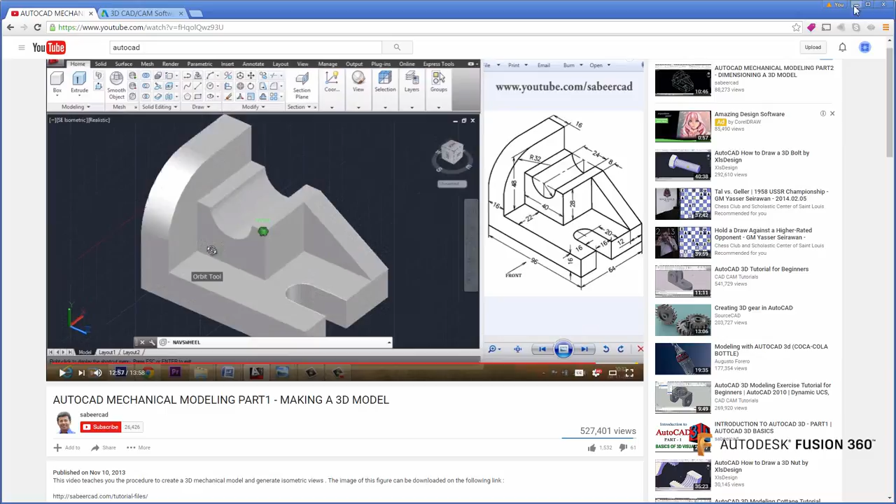So this is going to be a really nice apples to apples workflow. This is probably what you're familiar with if you're doing 3D AutoCAD right now, and then jumping back and creating it in Fusion. So if you want to see AutoCAD, watch this video. If you want to see mine on how we do it in Fusion, watch this.

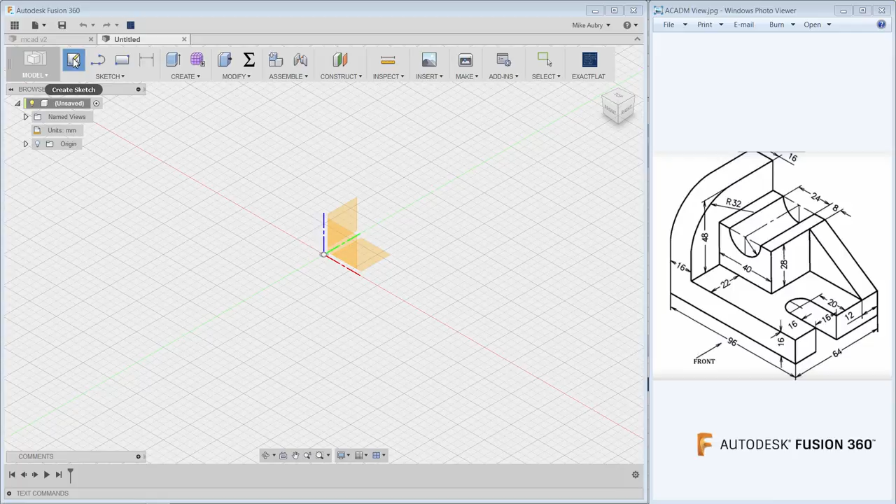I'm going to start from scratch on this by making a new design. The way we create 3D models in Fusion is we start off actually by making 2D sketches of the profiles we'd like to extrude. And so that's what this create sketch option is. We'll choose that, and then imagine like a piece of wax paper that sits on top of a table. We'll actually apply a sketch over top of one of these planes. Usually it's one of your origin planes that are shown here, your XY, your YZ. I'll actually click and put that over top of the XY one.

And then I'll just go to my top view. So there's your view cube like you'd have within AutoCAD. And we'll start creating our profiles. So the profiles are made with geometry that you're already familiar with coming from AutoCAD. So things like your rectangles, your arcs. The iconography is very similar, if not exact, on many of these items. The way you apply them is slightly different.

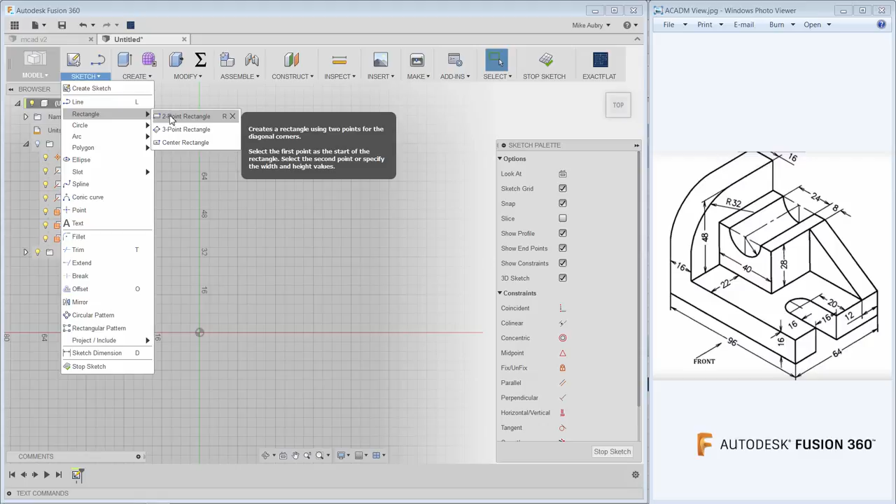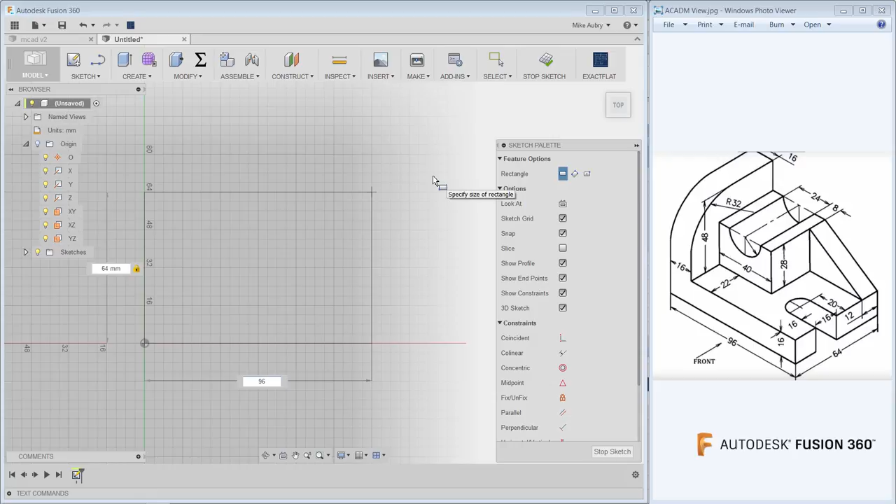We don't have a command line anymore, but a lot of that explicit entry style of creating geometry is still within Fusion. So for instance, if I go and start my rectangle here from the origin, good modeling best practice. Even though I don't have a command line, I can still be really precise from the get-go how big I want this rectangle to be. So I'll just go and say I'd like this to be 64 millimeters, hit the tab key, and make my horizontal geometry 96 millimeters, hit enter, and I have exactly the right size rectangle to start building from.

Another thing to notice is that it added the dimensions. So these dimensions are different than the common dimensions you'd see within AutoCAD. These are more analogous to what we'd call power dimensions in AutoCAD, in that they're parametric and you can drive the geometry from them. So if I go and I make this thing 50 millimeters, notice how the geometry updates. If I go and I put it back, everything moves. This is super powerful. It makes editing so much easier.

So as you get into Fusion, you'll really begin to love these dimensions. So definitely don't shy away from adding them. It's actually best practice to make sure you add dimensions to all of your geometry. As you're getting started, though, you can make highly accurate and precise models with or without dimensions.

Another way to do this is you can actually use your grid settings to make it so that the geometry is accurate to whatever you need it to be at. What you'll notice here is I have an adaptive grid. So as I zoom out, you'll notice that the increments are in 50 millimeters. As I zoom in, they get more and more precise. This is the default setting.

So if I wanted something to be 16 millimeters off, I just zoom in a little bit and go 5, 10, 15, 16, add a line. So here's 16, and you just kind of move up. I don't need a dimension. I can just go and measure it, and we'll show that this is actually 16 millimeters apart. So that's a really common way to model things up in AutoCAD.

AutoCAD users like to know that their lines are aligned to where they want them to be from the get-go, and that's what this grid allows you to do. In addition to that, you've got trim and extend. Those are still options you have coming from AutoCAD. So here, I'll trim these away, make it so it's in the right place. In this case, a lot of the dimensions on this part are divisible by 4.

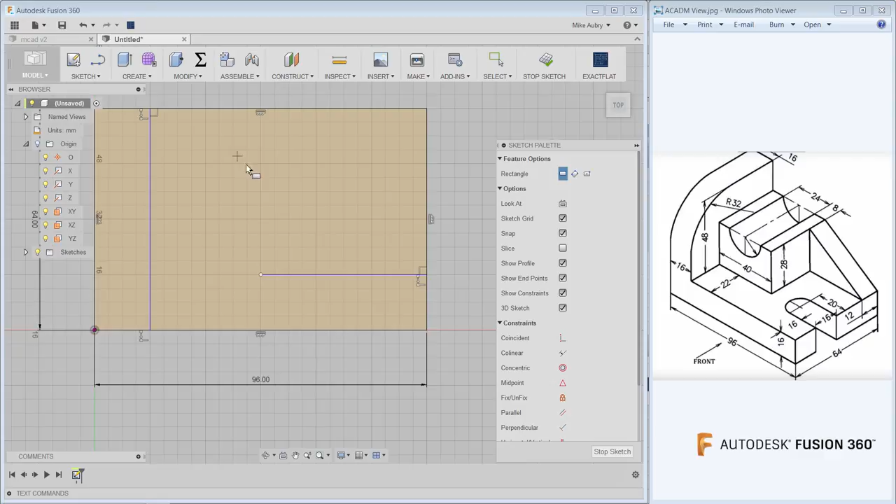As you get more familiar with the way Fusion thinks, you will gradually start to move away from using grids. You'll actually start just building geometry, and then you'll dimension it later. So let me show you where you'll get to. What I'm doing here is I'm just going to create some basic geometry, and then I'm going to dimension it later to see how it behaves. So I'll add just an arc here, and then I'll add a line.

And what I'm creating here is geometry that's not dimensioned, but it is constrained, and I'm choosing how I want the geometry to behave. That's what these little icons are. If I hover over this, this is actually a horizontal constraint. This is a tangency constraint. Check this out. If I make a line here, that's that little horizontal constraint there. I can't move it, so it's horizontal. It's always horizontal. If I delete this, now I can move it.

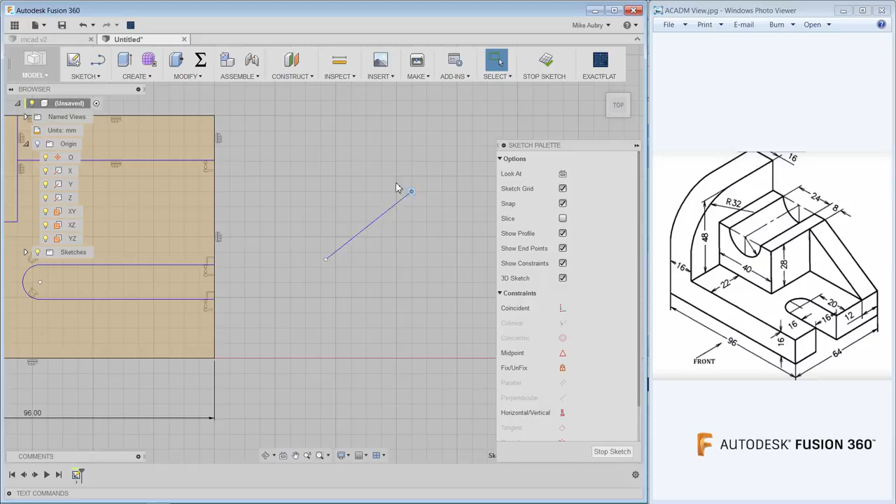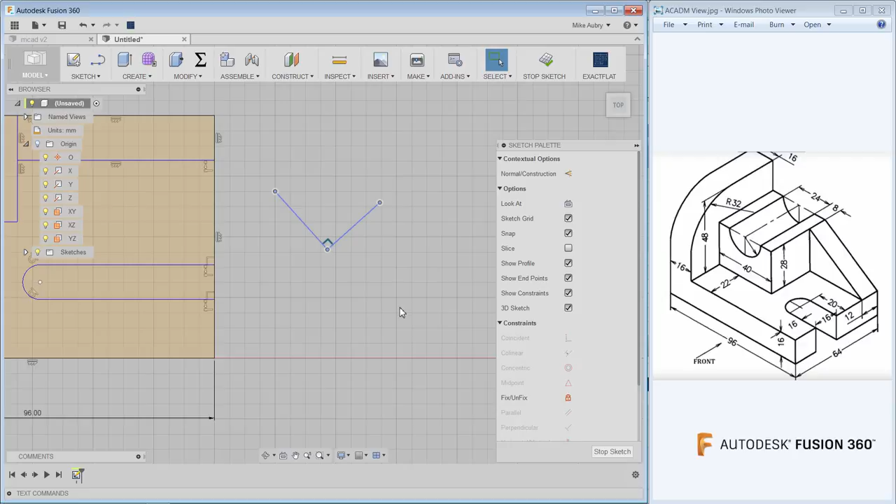If I move it here, and let's add another line, I can add a constraint. So there's no constraint right now other than that they're coincident, they're touching. But I can actually say I'd like this to be perpendicular to this line. And now I have an icon that shows that. So I can move it. So these little constraints you have right here can determine how your geometry behaves. And they're really powerful. It's a little bit of extra thought than what you'd sometimes have in your regular AutoCAD stuff.

But what it gets you is when I add my dimensions, it makes things a lot more editable. So if I just add this one, we know this one's accurate. I already put it in the right place. But I can add this, which I know is wrong. But now when I make it 40, everything updates the way I would expect it to. It's behaving the way I want it to. I can say I'd like this to be 22 offset. Behaves great.

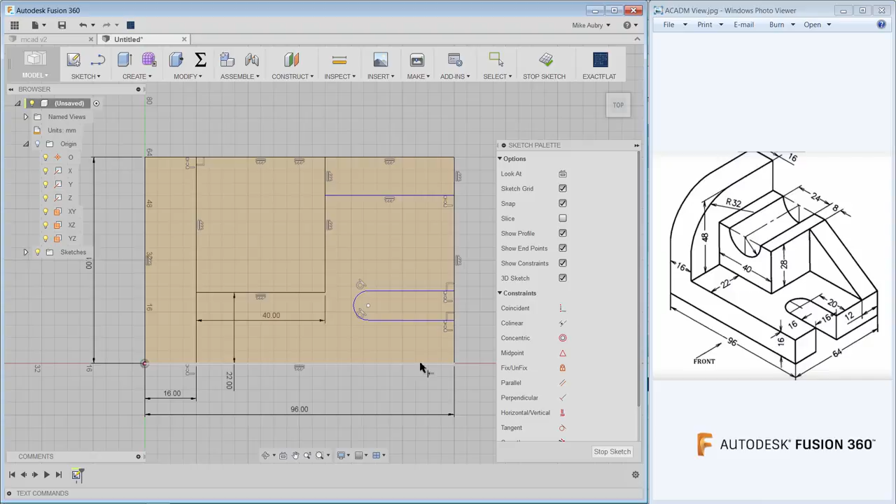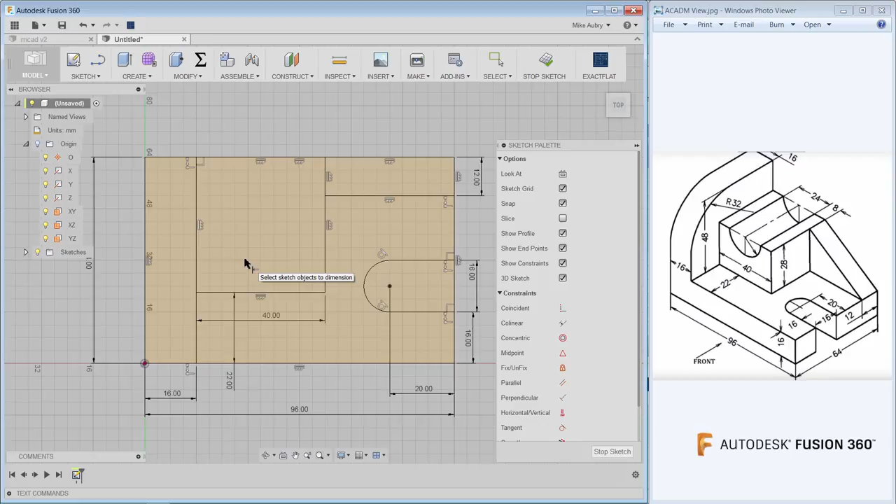I'm going to move this little friend over here. We'll say this is going to be 16. And we'll say this is going to be 16. And this distance is one that's 20. See how you can really get going on this stuff really fast. It doesn't take long. And we'll say this is from here to here. That's 12. And before you know it, we've got a nice foundation that we can start creating our model from.

So the next thing we need to do is add some depth to it. We need to make it 3D. And so what I'll do is I'll go back to my home view, and we'll extrude it out. The extrusion is actually what we call a feature. There's a whole bunch of different options to create geometry. That's what this extrude is.

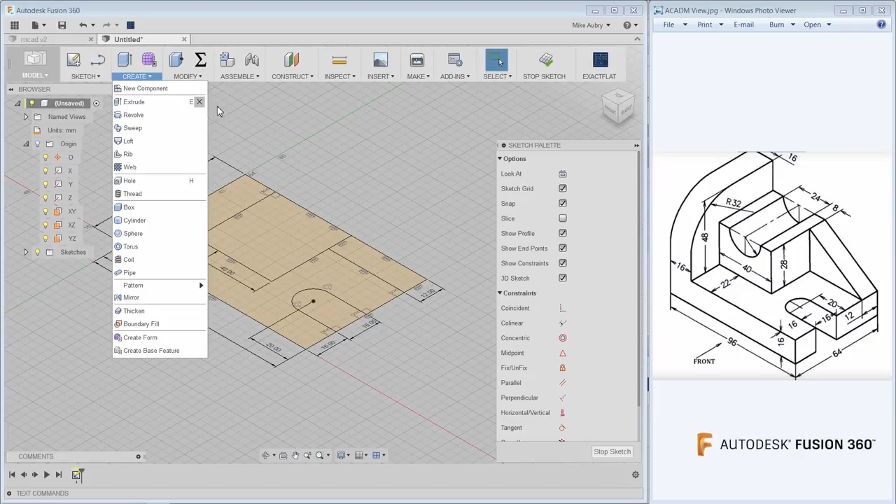I want to show you another tool here. It's actually called press pull, which merges a couple of these different creation tools that we have. So what we'll do here with this press pull is it'll actually do the extrude for us, and then we'll use it later to make a fillet. It's a nice general all-purpose tool, really handy.

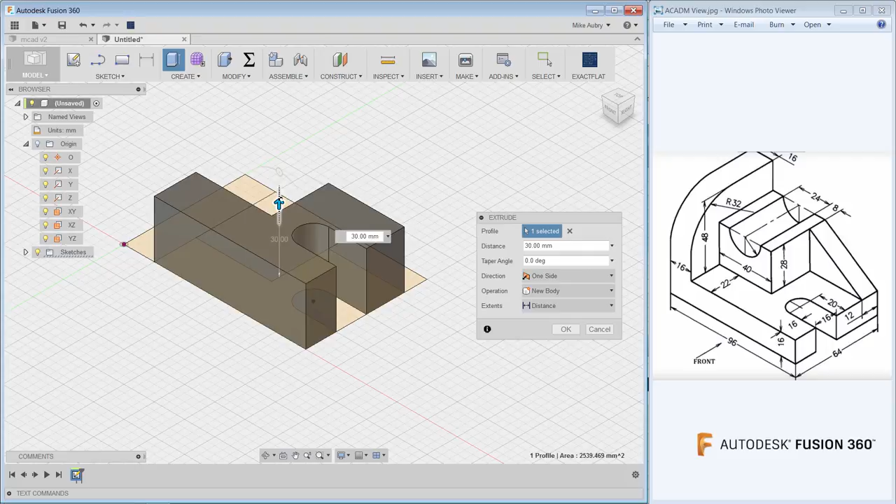So as I'm extruding out this what looks like an H, I need this thing to be 16 tall. It's actually going on increments of 5. If I zoom in a little bit, now it's going in 1. So that's actually the snaps, going as a function of how far you're zoomed in. So now we're at 16. That's perfect. And now I have my H, and the sketch disappears.

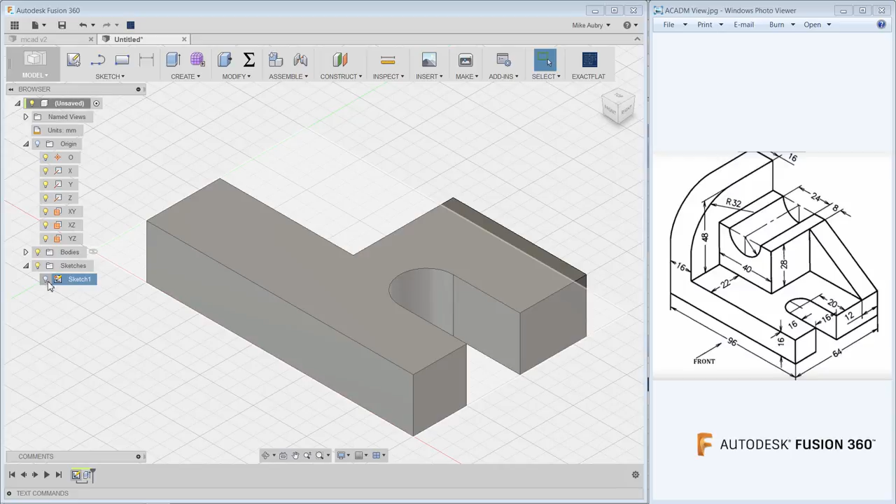That's no big deal because we can go into our folder here and just turn it back on. Much the same way AutoCAD uses layers, we use the same light bulb for visibility of the various things you'd have over here in our browser. So we'll turn back on the sketch and create the rest of our features. We'll extrude out these profiles here using that same press pull again.

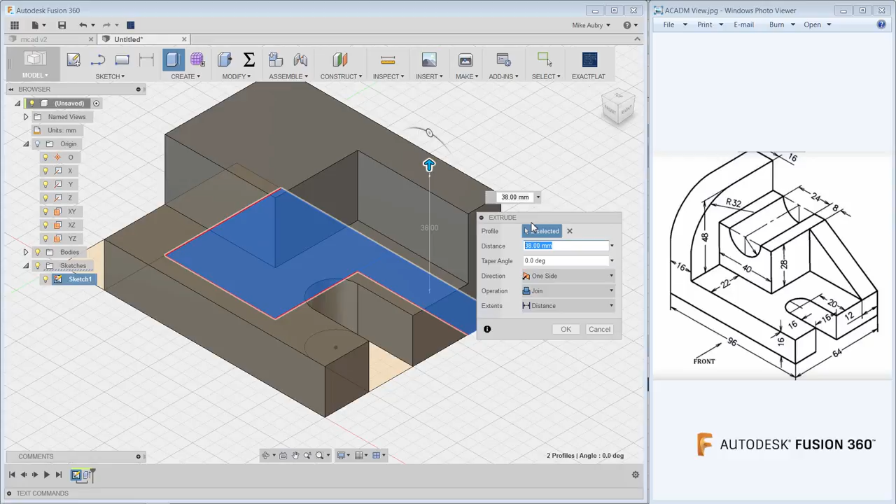Choose these two. These are going to go up to a distance of 16 plus this 28. So I'm actually going to write that in right here: 16 plus 28 millimeters. And you'll see that now it's all the same part. And I'll take this as well. I'll right click and repeat the process, repeat press pull. If you just right click, it's always right there anyway.

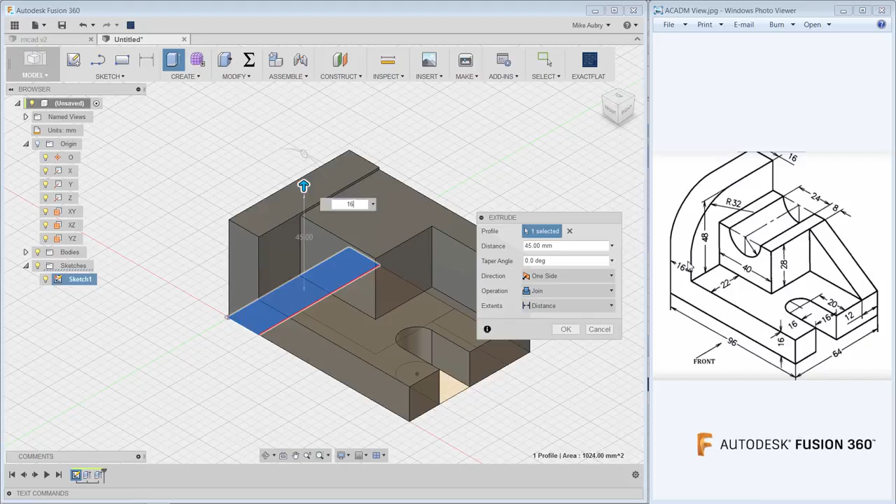Move this up again. This is a little bit higher, so it's going to be 16 plus 48. And there's our pieces. Let me turn off that sketch so we can just see it. And we're on our way. So we still need a couple of things here. We need the fillet, and we need this chamfer here.

There's a couple ways to create these. The fillet's really easy. If you choose this edge here, remember that press pull, you can use that to make fillets as well. So I'll just create this and then pull it in. This is going to be a 32. So we'll call it that, 32. And it creates a fillet for us.

And then to create this shape, I can create a cross-section sketch, or I can do a chamfer. Let me show it both ways. If I choose this edge right here, press pull is going to want to make a fillet, but you can make a chamfer right here just by hovering down here. And it's not going to be an equal distance one. That's not going to get us what we want.

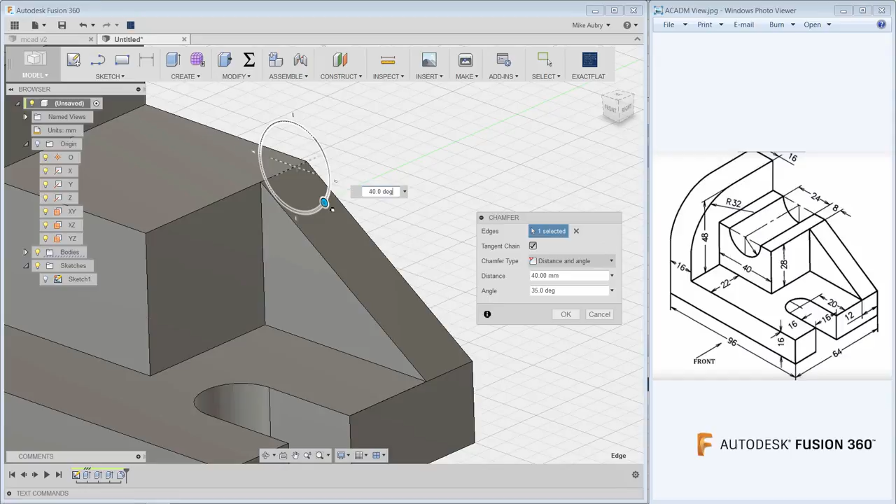So what we actually want is a distance plus angle. We'll go out to this surface here, and then bump this up. That's looking pretty good at 35. So that's one way to create it. The other way to do it, if I undo my chamfer, so there's undo and redo, Control Z and Control Y, by the way.

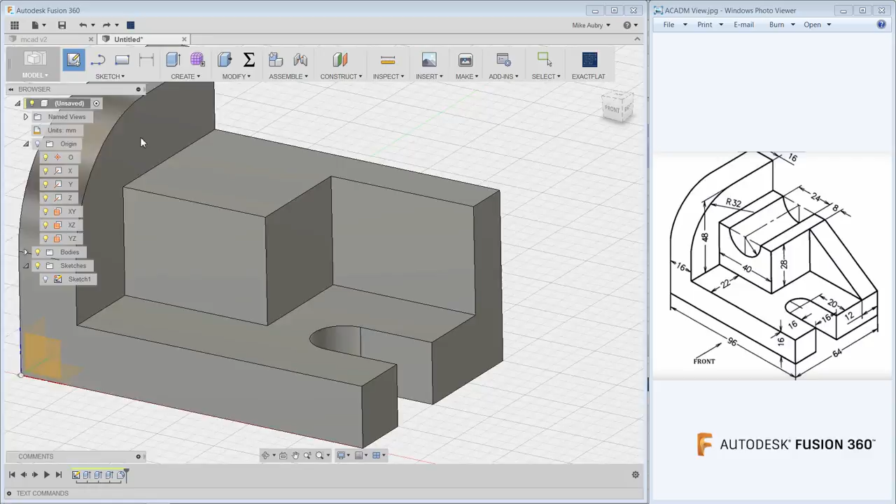The other way you can do it is create a new sketch on this plane right here. Remember, we're talking about these wax paper. Now I'm actually going to put it on this face. This is pretty handy. You just go on here, make a line, click on this point to this point, and then extrude it. Just get rid of it.

Let's just say go this way, and you can see what we're creating. In this case, the red says we're taking away. So that's another great way to do that shape. To make this hole, we do need to make a sketch on top of here, or we can make a circle here. It's your choice wherever you want it to be.

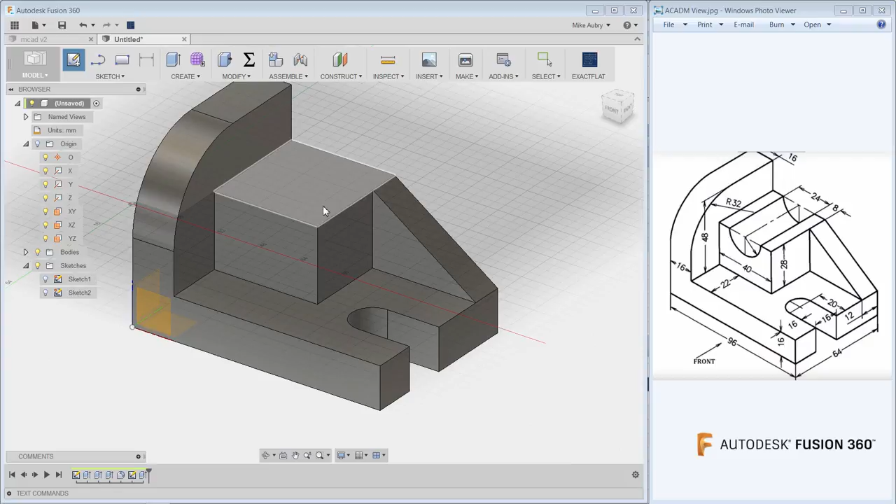I think I showed you extrude, so instead of extruding a hole, let's show you revolve here. I'll create a sketch on top of this face right here, and we'll get to a nice overhead view. Down here, you still have your look at, your pan, all these things. So look at this face. It's a handy way to do it.

And I will snap it to that midpoint. You see that triangle that appears? There's a midpoint from there. And then I'll just make a line right here. That distance is going to be, where is that radius? It's going to be 24, so 12. So dimension, by the way, D is your hotkey for dimension.

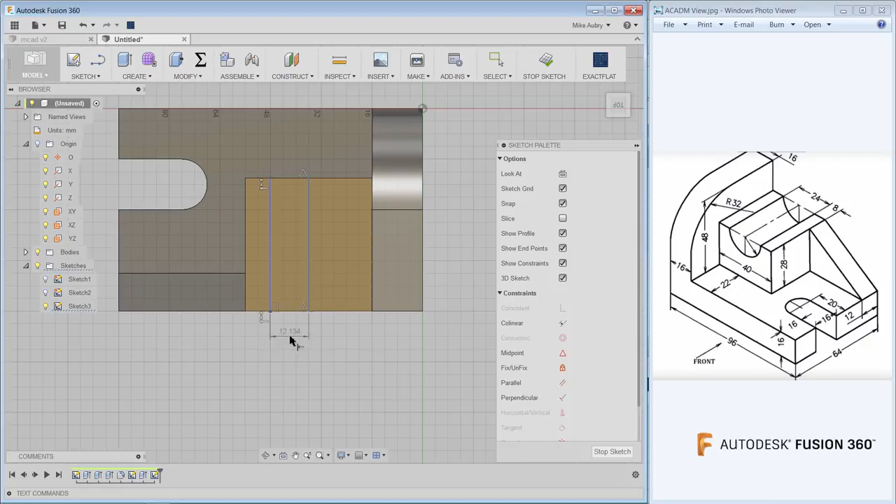Here's 12. Stop my sketch, go back out, and then we're going to use this profile actually. Under create, there's an option to make a revolve. We'll choose that. So we got this profile here. I'm going to choose my axis as this. See that nice little preview of what it's going to do? And we've got a really nice looking part.

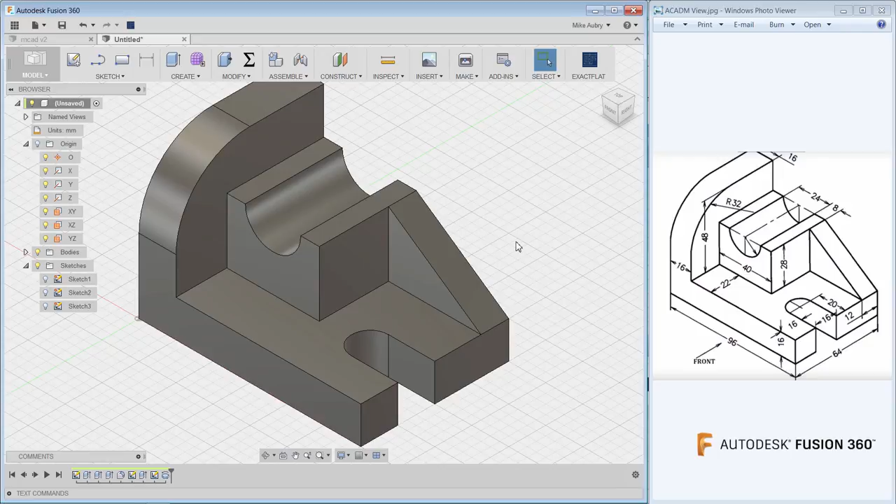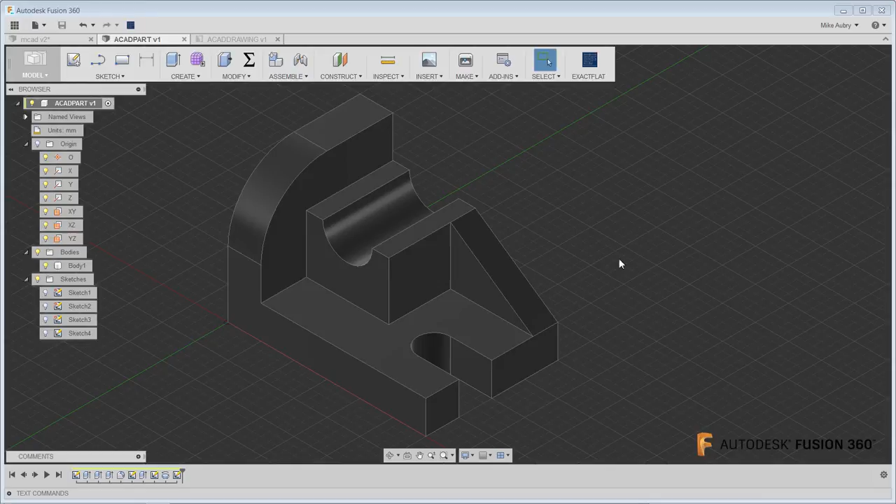Another question I get from AutoCAD users is asking, can you make it look a little bit more like the AutoCAD modeling space? That's actually under your display settings, under your environment. If you go to dark sky, I hate this, by the way, so if you ask me and you're in dark sky mode, I'm not going to help you. But if you want to have the black background, that's it. And then, yeah, have fun with that. Anyway, that's the black background.

But yeah, if you'll notice, in most of our tutorials and a lot of our support documentation, our standard is photo booth. So that's the one that you'll want to be in if you want to be like the way a lot of the tutorials and stuff are set up. Just get used to using photo booth.

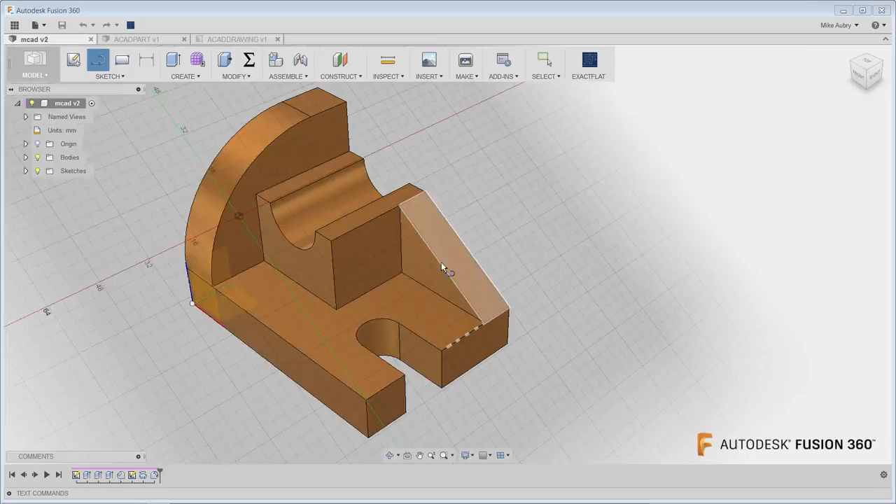It's not that bad. The next thing I want to share with you before we go is a couple of extra power tools that I think are really handy for people coming from AutoCAD. The first one is I'd be remiss if I didn't tell you about the S key. So what the S key does is if you're really missing your command line about now, if I hit the S key, you'll notice there's an option here to look up different tools that you have at your disposal.

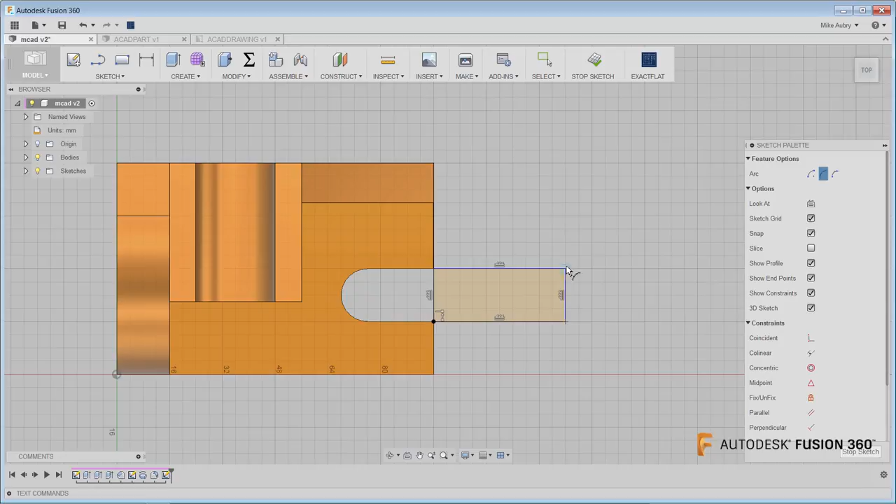So like if I don't know where the rectangle is, I can just write in rectangle, and there's the option. I can say, oh, there's my 2 point, thank you. So I'll go and say from here to there, and that's exactly what I was looking for. If I hit the S key again, say I don't know where the arc is, there's my 3 point arc. It's great. All that option is just all right there.

S key, project, where's that? So I can project these surfaces. So I'll pull it in. Now I've got my profiles. Everything that you have in your sketch, your create, your modify is all at your disposal within this S key. Furthermore, it can be customized if you're always using the same things over again.

So say I'm doing a lot of slots, I can actually make it so that this overall slot is just part of my S key. So then I go back and say, man, I really need to have a slot right here. Just hit S key, slot, and there's your slot. If you haven't made a slot in 2 weeks, no big deal. You just drag it and remove it. So you can customize, build these things up, drag them down as you don't need them.

It's all right there, and it's a really efficient part of the tool, and you're going to find a lot of similarities between that and I think one of the ways a lot of you probably were using the command line anyway.

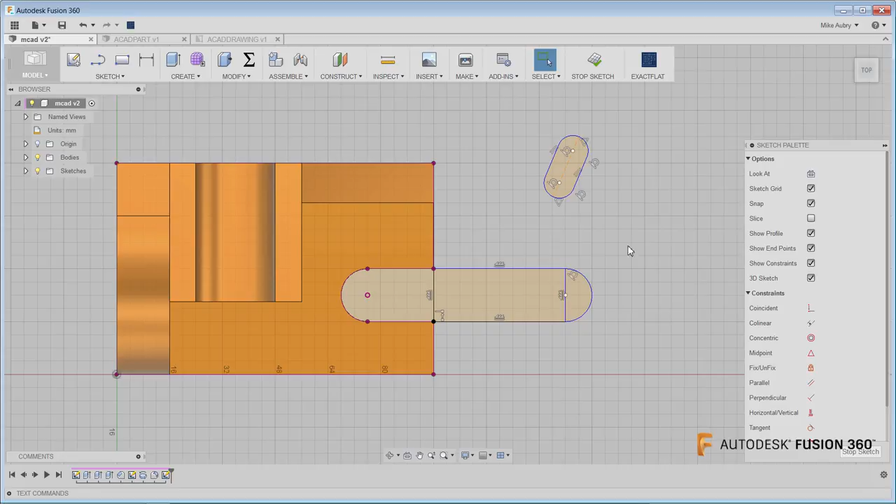Final tip for you before we keep building stuff here is the way we select things. Crossings and windows. That's a very AutoCAD thing. Notice how we go upper left, lower right. It's blue. Upper right, lower left. It's green with some hashes on it. That determines what gets selected. So if I go this way, everything that's 100% within that box gets selected. It's only the arc. Nothing else gets deleted.

If I go this way though, it selects the profile, the lines, everything. If I delete that, the only thing that survived was this because it wasn't touching that original box. So as you're going to select things, use that, because you're probably already familiar with how that works coming from AutoCAD. So here I'll just delete that and we'll move on.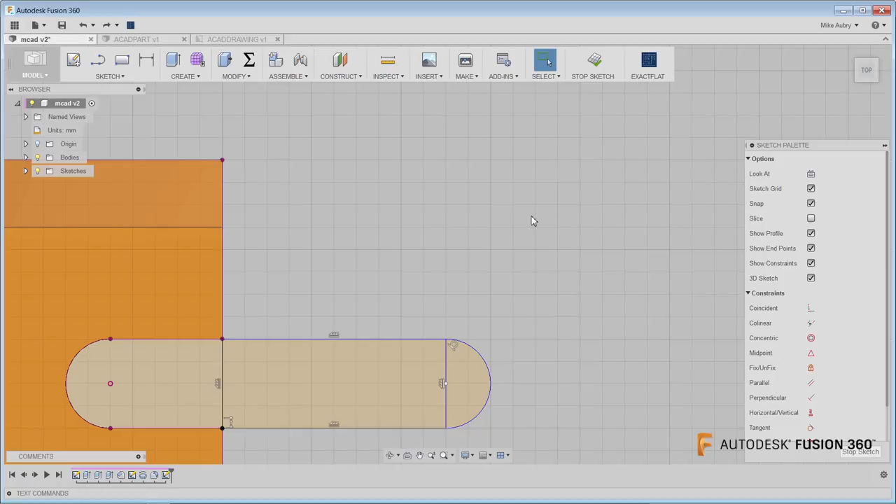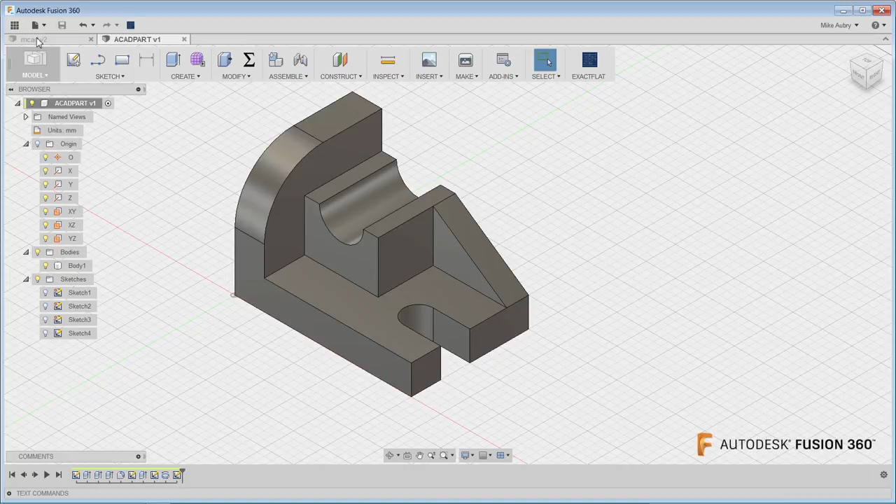So now that we have our 3D part modeled up, the next thing to do is get 2D documentation from it. So we differentiate in the Fusion environment between our Fusion models and our drawings. It's similar to the way AutoCAD would call it paper space and modeling space. And so what we'll do here is I've saved my part. I went ahead and hit save. And I'm going to now create a new drawing from design.

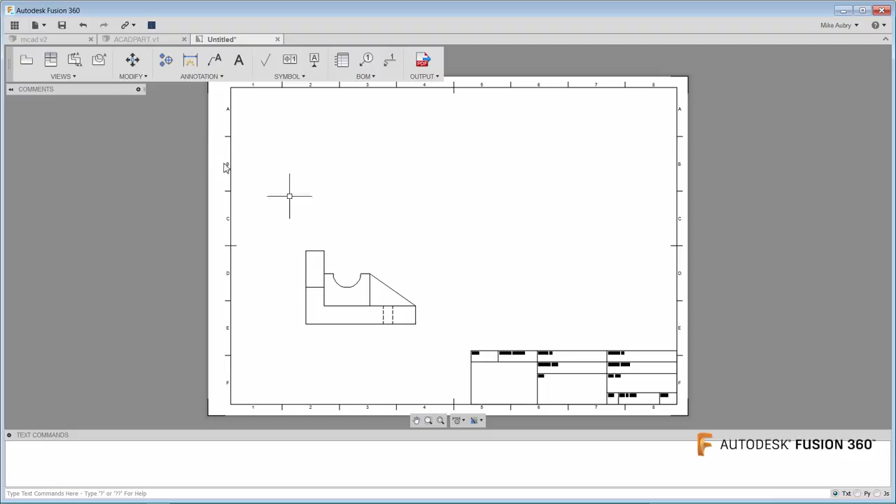So I'll choose my standard, my units, and then we'll pull in this F3D file and create our views from it. So here's our paper space. We'll go and choose what the scale is going to be, say 1:1, turn our tangency on, and then there's our base view. And then we'll go and make our projected views. So you just click this view, and then you can choose your top view, side view. Here's an ISO view you just get for free.

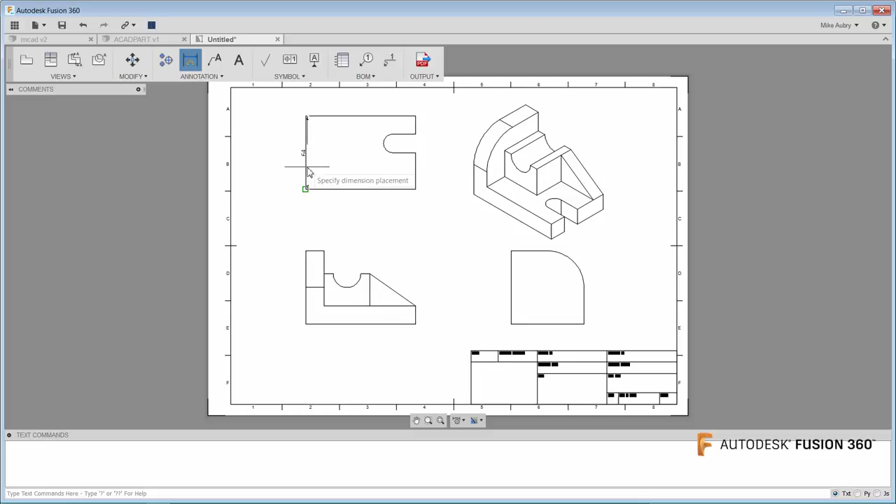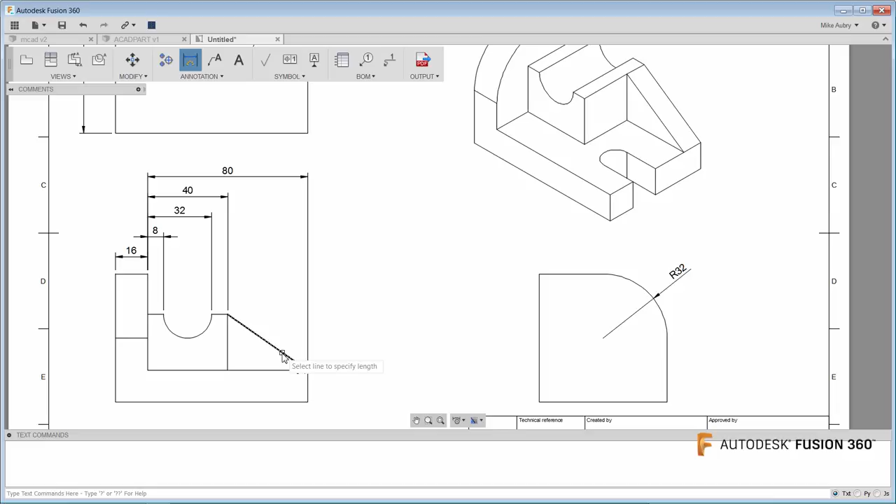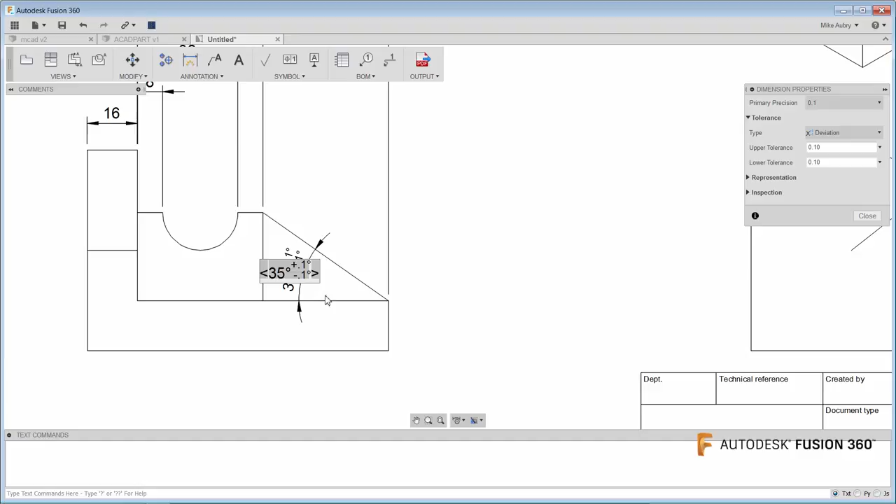Pull this down a little bit. Angular dimensions, you just go and choose, here's an edge, and there's your specified angular dimension. You can choose your tolerances, these things. So we go and actually choose, this is going primary. You go down to 1, you go all the way out to 4, way out there. If they actually want to say a deviation of this, plus or minus a degree, you can call that stuff out. So that's all there.

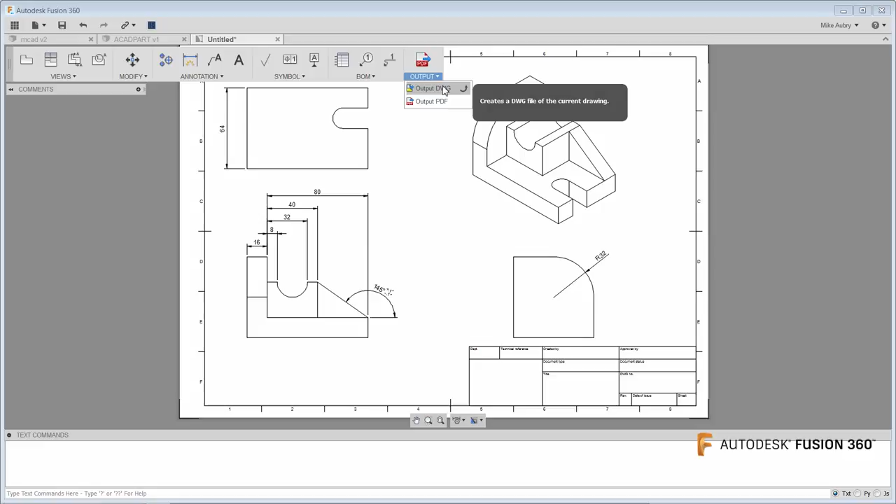There we are. You also have the options for things like section views, detail views, all that stuff's in there. What we don't have yet, in all irony, is 3D annotations. That's something that'll come in the future. But when you're done, you're ready to send this thing out. You can output it either as a PDF, send it to somebody, or you can output it as a DWG. It goes out to AutoCAD 2013 format, and that's your 2D environment.

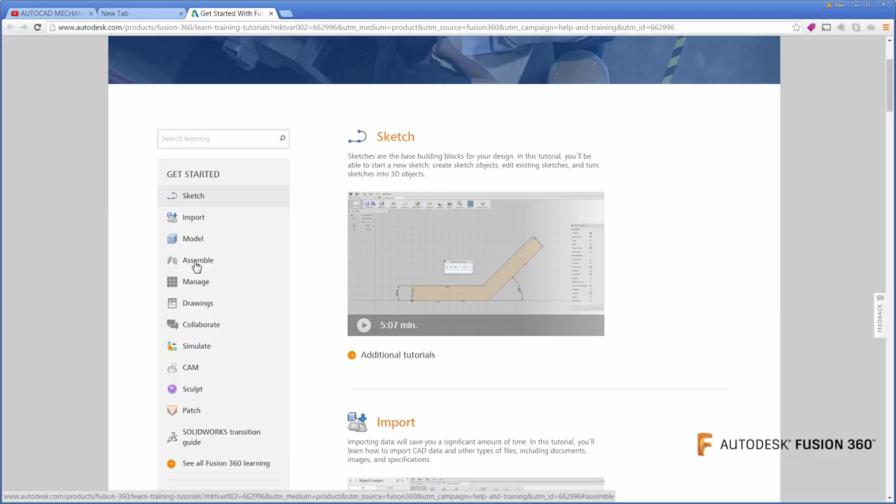We pumped a lot of time into coming up with some really intuitive getting started activities based on what you're trying to do, whether you're trying to sketch, bring in geometry from different CAD tools, modeling, assembly, how you manage files. There's a lot of different steps right here to help you get started with Fusion. They're general in nature, but they are good. Let us know what you think. That's the first area I want you to know.

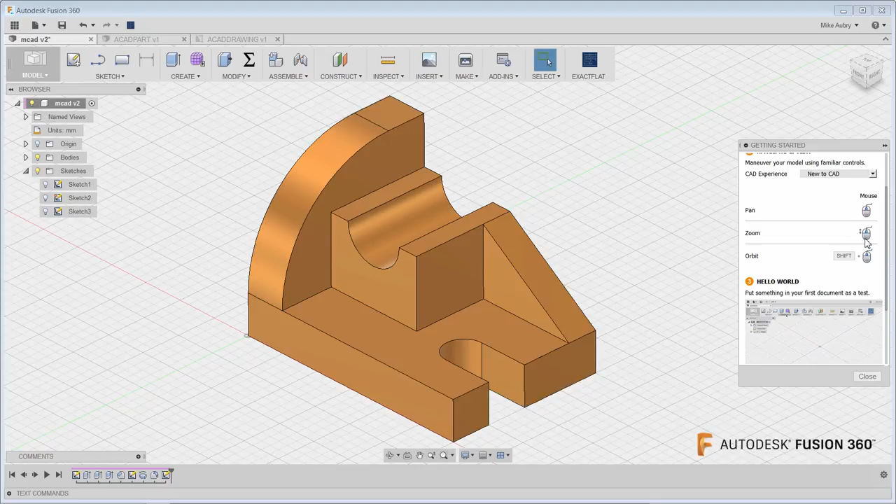The other one is, as you're getting started, use the getting started option here. This should have been turned on by default when you first started. If you've turned it off, maybe turn it back on, because this has a lot of quick things like how do you change your units? How do you set things up to be on defaults from some common CAD tools? Basically everything except AutoCAD, in all irony. But basically what's pan, what's zoom, what's orbit, and some ways to start creating. This will also help you out.

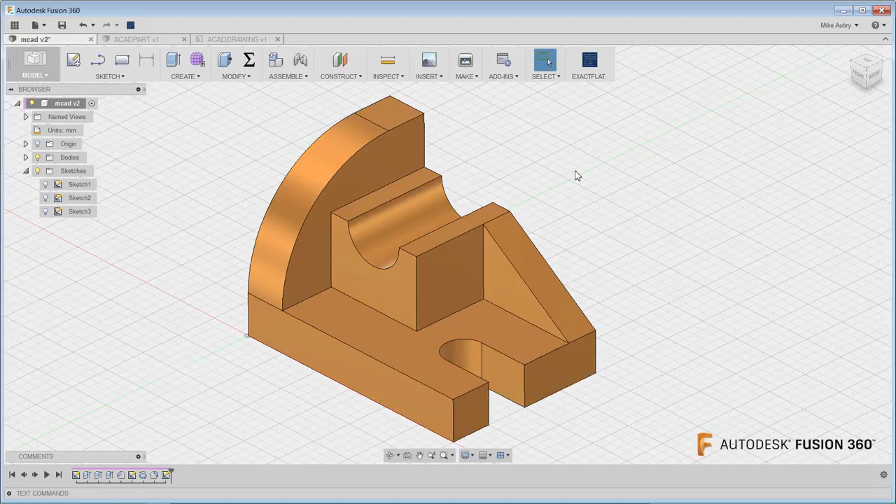So with that, everyone, I hope this was really valuable to help you get started coming from AutoCAD using Fusion. I had a lot longer list of things I've found similar between the environments, but I decided to focus on the sketching side of things, and I hope it was valuable for you.